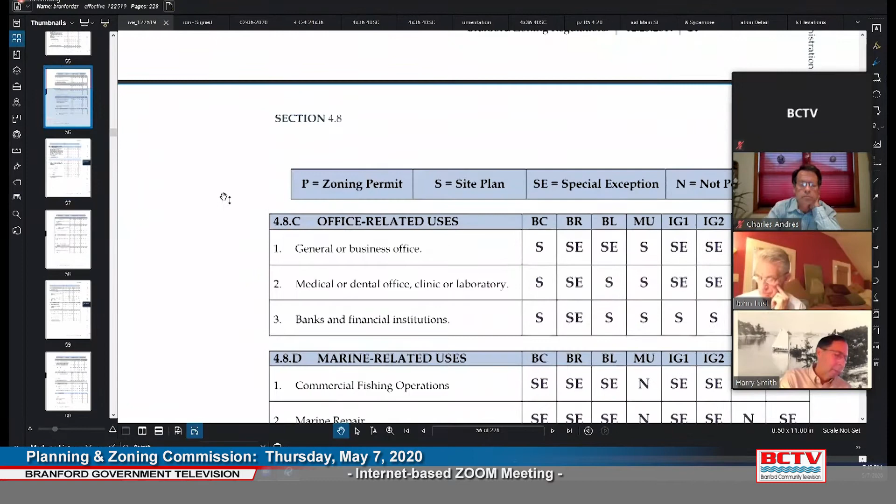In reviewing the town regs today to get prepared for the meeting, I thought it was interesting that in our IG2 zone, the regulation we cited, medical laboratory in the IG2 zone and the IG1 zone, requires special exceptions, which has triggered this public hearing.

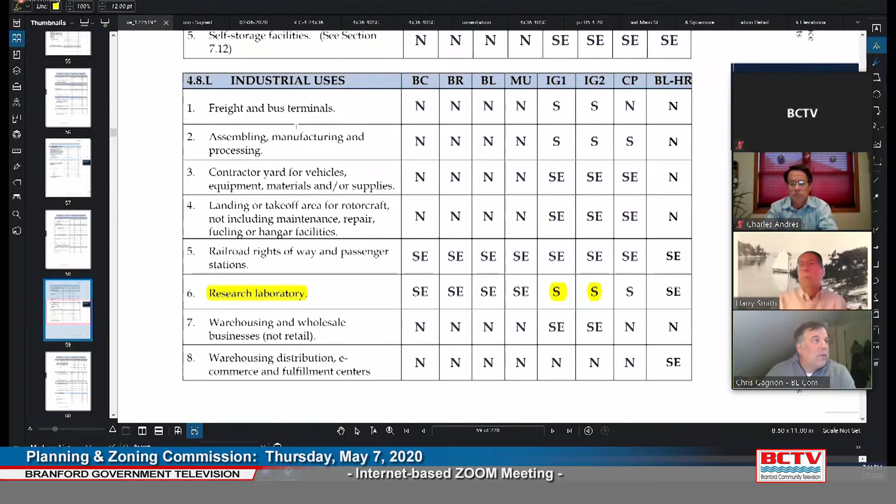Town Planner Harry Smith: Chris, you're also here because there's grading and excavation within 100 feet of an inland wetland, so that's a special exception in and of itself. So that's all folded together, and that's another reason why we went through the extensive public hearing process with the wetland folks as well.

So, but I just thought that was an interesting - what's the word I'm looking for - trivia of the regulations.

We're proposing a 20,000 square foot building. The building itself is well within what is allowed in terms of the regulations. We don't need any relief from any of the required regulations in terms of the building size, the parking required, anything like that. So it really is a good use for this zone, this laboratory office building.

It is an existing - not Guilford, that's the town next door - it is an existing Branford business that is looking to expand. Branford residents own it. It is folks who live in Branford, work in Branford, enjoy the town and want to stay in the town and are expanding their business in town. These are high-paying, white-collar laboratory jobs that I think are a real asset to any community.

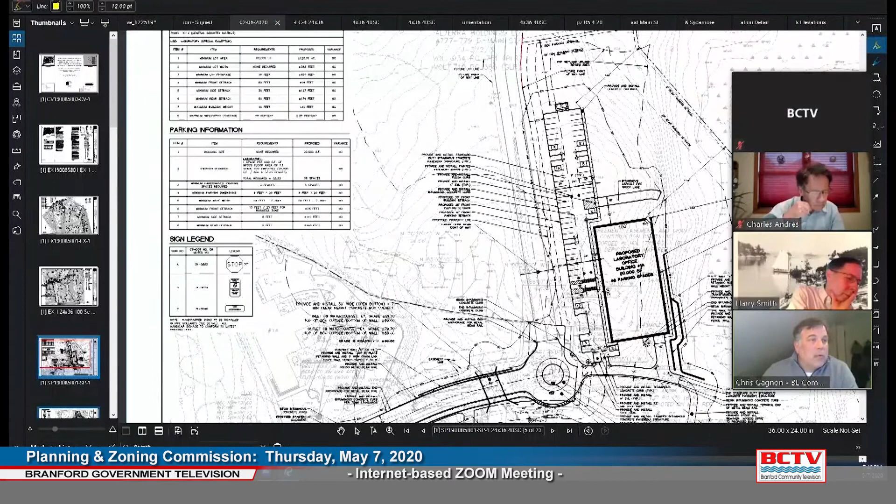We're proposing a 20,000 square foot building and associated parking spaces. Throughout the wetland approval process, we were working with the town engineer. We had a peer reviewer involved, and we worked with town wetland staff and met with the fire marshal as well.

A couple of the items, as a result of meeting with the fire marshal, we needed to include this fire truck access along the northern side of the building and provide an additional path of travel for fire egress for people within the building. So this building has been vetted, and parking and access has been vetted through the fire department.

We went through the wetlands process using the prudent and feasible alternatives process. This building originally was located a little further east, closer to the wetlands, so it has shifted over a little bit. To make the grading work, we need to use retaining walls.

The proposed retaining walls meet the town standards. Your town requires that they can't be any taller than 8 feet, and when you have more than one, you need to set them back from each other the required distance. So that's what's going on at the site.

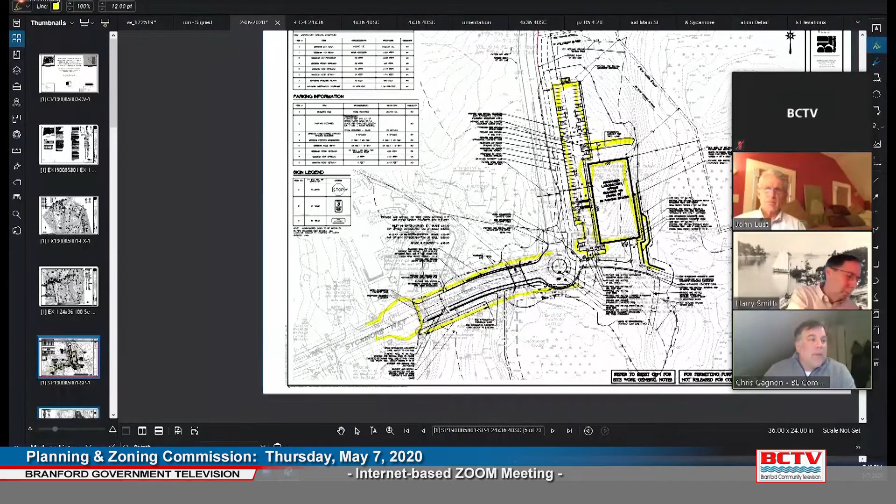Currently a cul-de-sac that ends. When the subdivision for Sycamore Way was made, this right-of-way was established to provide access to the properties back here. So going through the wetland process, our access point was really determined by the right-of-way that was set up.

There is a crossing here. It's a stream that comes down about like so. This stream then continues through a series of wetlands and then gets underneath I-95, in a pair of twin 18-inch squashed pipes. So to get under the highway, it only needs plus or minus 3 feet in diameter of pipe to get through.

In the wetlands process, we originally were proposing a smaller closed bottom box culvert. The process has evolved, and what we are now proposing is a 30-foot wide box culvert that has an open bottom to it. So we are maintaining the flow path and the ground cover of the native stream. In terms of wetlands impacts, this was the prudent and feasible alternative that we went with.

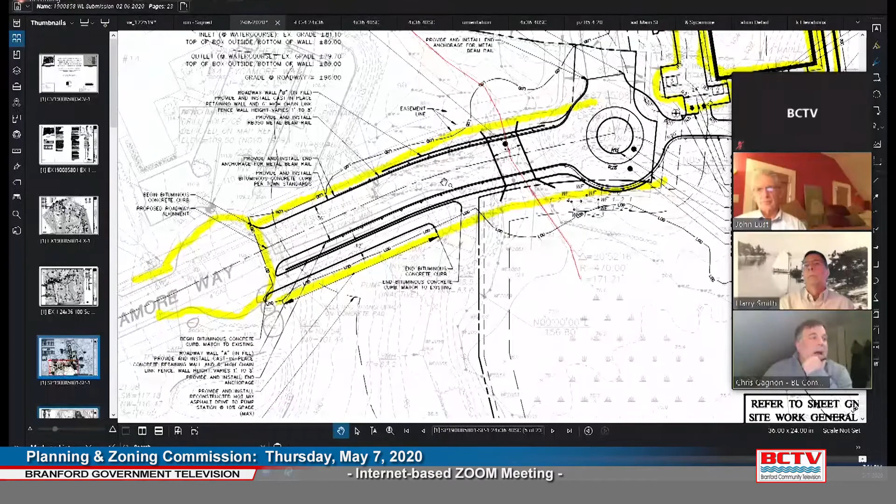As this plan set is currently provided, the initial concept was to have this cul-de-sac be turned over to the town. So it is currently depicted as a 36-foot wide town road meeting the town standards. We did that for a couple reasons. One, we wanted to make sure when we designed our retaining walls and got them permitted, we were depicting what was essentially the maximum footprint and wetland impact that we would have.

And so this footprint that we got passed through the Wetlands Commission is essentially as wide of a crossing that you could have and stay within the allotted right-of-way, and construct it with the retaining walls at the heights allowed by the town.

Going through the planning and zoning process, it was brought to our attention that the proposed infrastructure that was necessary to cross this wetland area, to the satisfaction of the Wetlands Commission, has set up a situation where the infrastructure is not something that the town is willing to maintain. So we are now proposing that this road, the extension of Sycamore Way, will not be handed over to the town, but will remain a private development.

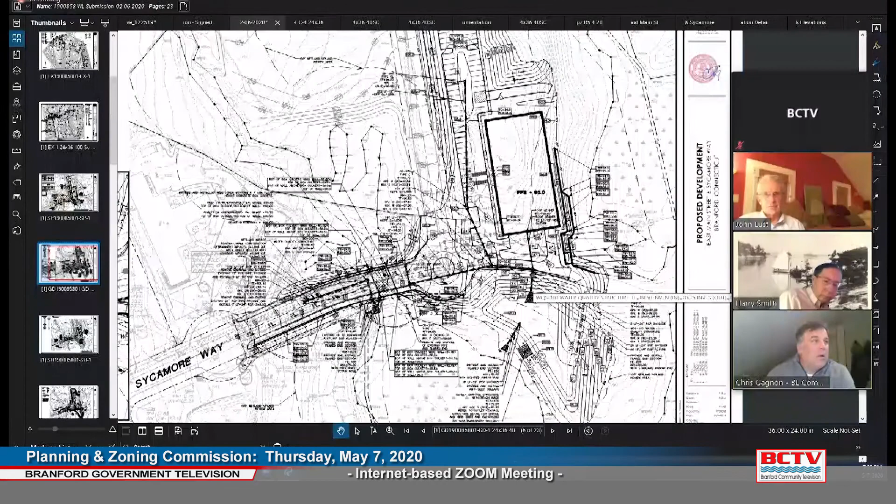To go a little bit into the plan set, the grading and drainage plan has again been vetted through the Wetlands Commission. We collect all of our runoff from the parking lots, the roof leaders from the building. We pipe that to a pond here via a hydrodynamic separator. So there is a water quality component to the storm system, along with the basin itself.

We also have a stormwater collection system that picks up what is the existing storm system for Sycamore Way, which currently ends in a head wall right there. What we are proposing to do is pick it up, route it through a water quality structure hydrodynamic separator, and then release it just south of the proposed roadway, so that the stormwater ends up exactly where it would originally. Currently, it follows this ditch right here and then turns down the stream. So we're just replicating drainage patterns and then providing some final scrubbing of it in the hydrodynamic separator.

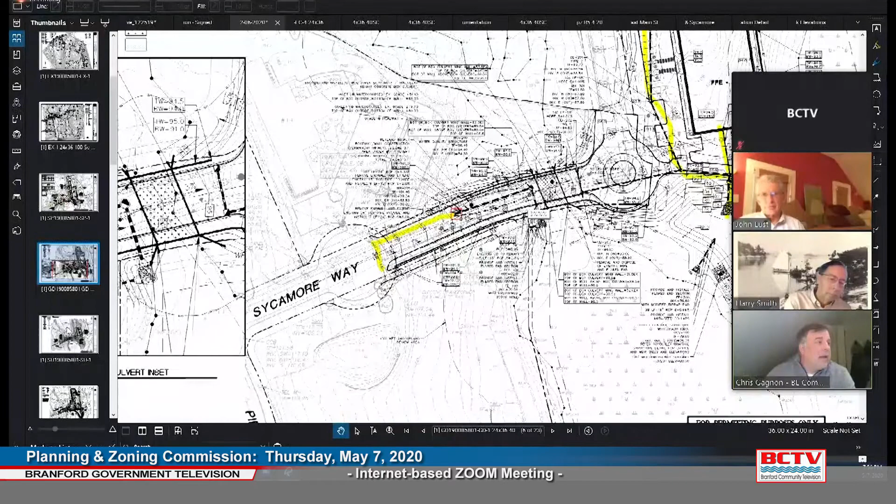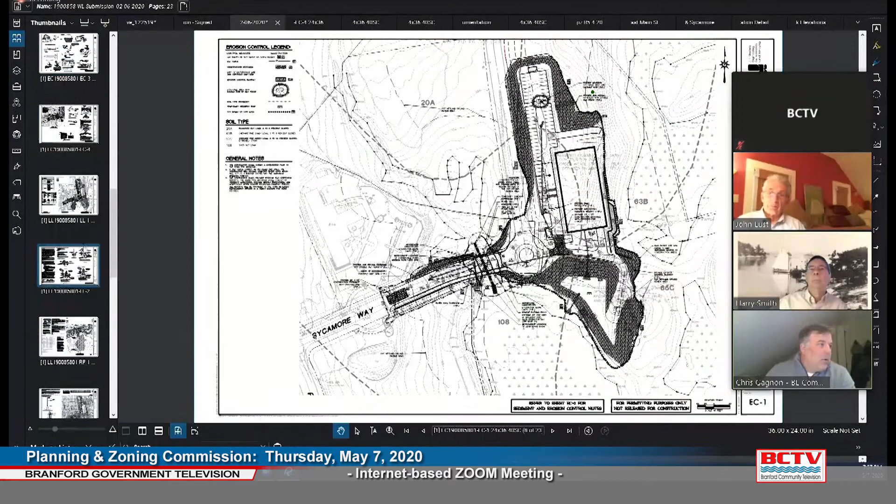We have a landscape and lighting plan. Going through the plan set, we have proposed utilities. We're tying into the sewer system on this side of Sycamore Way, bringing water in from Sycamore, electric, etc. So the utilities are fairly standard, but we have sewer and water in the area, no septic required. We have a comprehensive erosion control plan. Our overall impacts are less than what is required to trigger a formal SWPPP, but due to our proximity to the wetlands, the applicant volunteered to be restricted by the standards that would be applied to larger projects that need to get a formal SWPPP. We have also provided a landscape plan that is in compliance with the town regulations.

We have provided a site lighting plan, again, in compliance with the regulations.

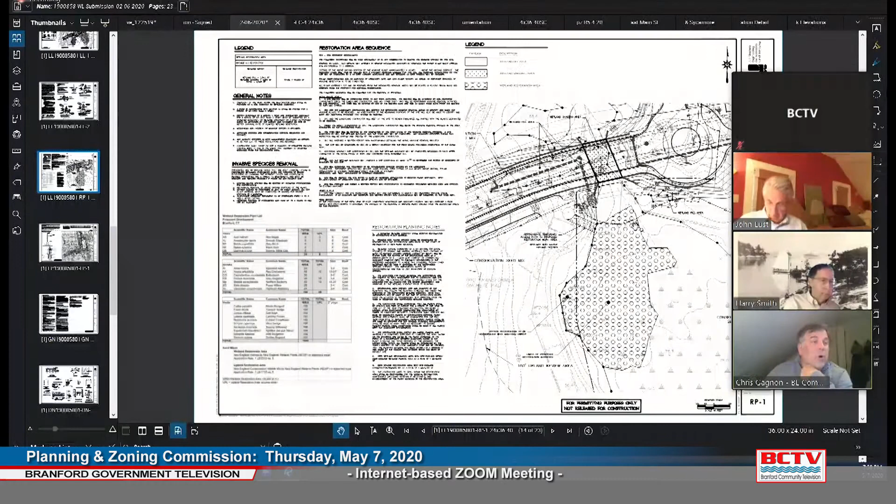As I'm sure most of you know, when you have filling of wetlands, you need to compensate for that in some way. The way in which we are compensating for the wetlands filling is we are proposing a wetlands restoration area. There's a well-defined pocket of Phragmites just south of the crossing that we plan on eradicating and replanting with native wetland vegetation. I thought it was an excellent and innovative way that the Wetlands Commission was handling that.

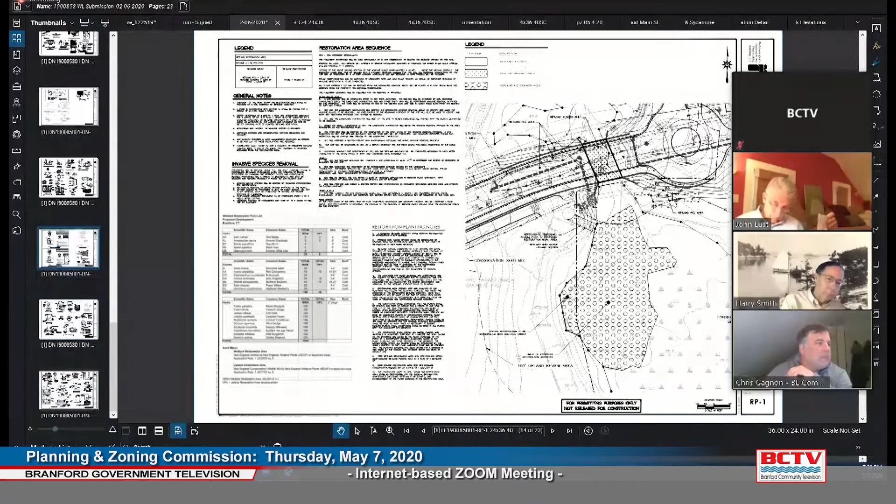And then the plan set gets into the details, the details for the hydrodynamic separator and things like that. So that is an overview of the process.

We have also been in receipt of a number of comment letters. I mean, not an overview of the process, an overview of the project, excuse me. We've also been in receipt of a number of comment letters from John Guskowski, a town planner reviewer. The engineer has provided some comments, as has town staff.

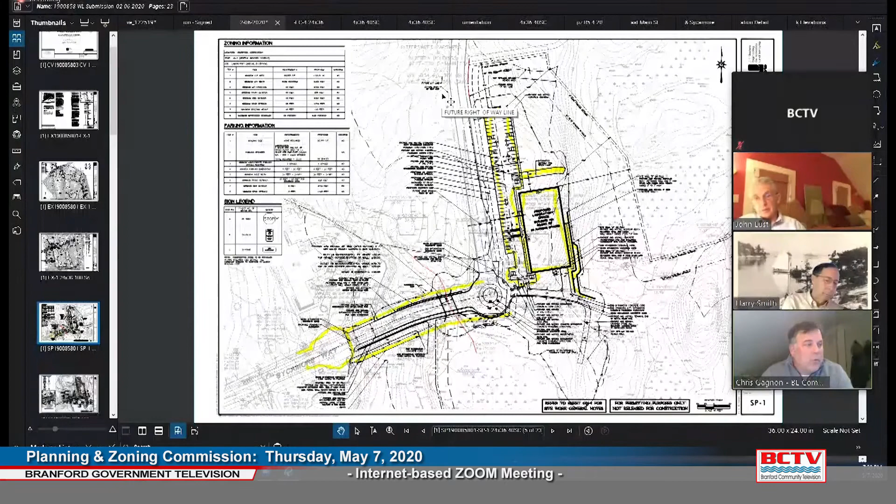I don't know, Harry, if you would like me to go through that, or if you'd like to take a moment now, and if the commission has some questions about what I've presented, this might be an appropriate time to do that. This is a little different because it's this type of public meeting - if we were all in the room together, people would have maybe raised hands or asked some questions at this point. So it feels like an appropriate time to at least throw that out there as an opportunity, but it's your meeting. So just let me know at this time how we want to proceed.

Charles Andres, Chair. Thank you, Mr. Gagnon. At this point, maybe we can ask Harry, do you want to summarize anything from the staff report, or do you want to turn it back over to Mr. Gagnon to address engineers' comments, or how do you think you want to present this to us, Harry?

Why don't I quickly summarize them, and then if there's anything Mr. Gagnon wants to get into in detail, we can do that, or any of the commissioners as well. A lot of these are sort of technical issues that are either well on their way to being worked out, or that can be incorporated as potential conditions if they need to be.

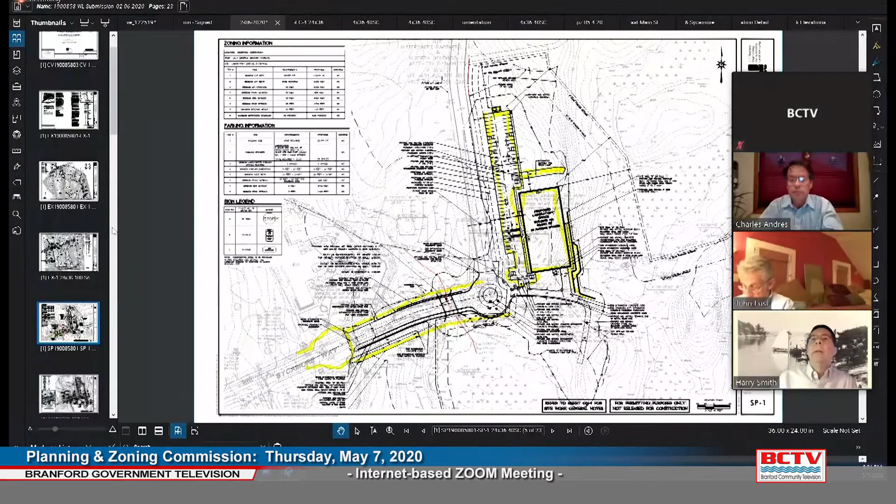But I want to back up a little bit and talk about the properties included in the application. There are two, as far as I understand it, and Chris, I don't know if you could go through and show - actually the sheet you had up was great, but we can do this too.

So there was a piece of the Bittersweet Farm that is now property of the U.S. Army. You saw that a second ago up on East Main Street. The remainder of the property, as far as I understand it, consists of two parcels, and the parcel line bisects the building, which just disappeared, but yeah, so the Army's up here. Chris Gagnon, BL Companies: the Army site is up here.

This was carved off of the property a few years in the past. That is correct. So Chris, can you show them where the property line is between the two parcels involved? Yeah, so it does bisect the building. But it's under common ownership.

Ownership, right. That could be addressed through a requirement to either merge the properties, or a requirement that would provide two options. One is to merge the properties. The other is to limit their separate sale without the express written permission of the commission.

But however, there is an area where the extension of Sycamore Way was proposed that is actually in what's commonly called a paper street that was part of the subdivision that goes way back to the 80s. So at that point, I don't know whether there was any design proposed for the crossing of the wetland. If there was, this could be vastly different and have created problems that were not foreseen back then.

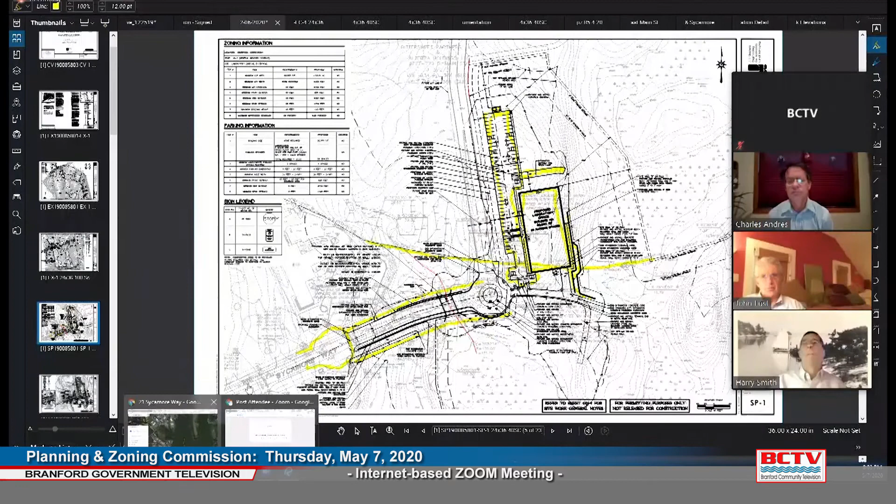And I know this is not gospel here, but you can see it's all connected through here. Yeah.

All right, let me show one map if I could. Chris, if you could let go of the share screen for a second. Yep, great, and I think I can do it.

So I should be able to see, again, that's the building and the parking area. And this is the existing cul-de-sac currently paved at the end of Sycamore Way. My understanding is the accepted town road ends here at the cul-de-sac, so this part of it is what you could call paper street.

My understanding is several easements exist that allow some of the proposed site development that extends off of the confines of the paper street, if you will, onto these adjoining properties to the north and south of the Sycamore Way and private driveway layout. I did receive from the applicants copies of the easements and this sketch, which I think is fairly new, within the last couple of days. And I've shipped that all off to town counsel just for a quick review. I'm assuming they cover everything that needs to be covered.

We just want to double check that. And town counsel was involved with the review of these easements during the wetlands process too. So I do believe it's 100% the right thing to send it their way for this review. But it certainly shouldn't be coming out of left field for them. It's information that at least has been discussed in the past. So town counsel does have some history with these easements as we work through the wetlands process. Okay, again, Harry Smith, town planner, understood.

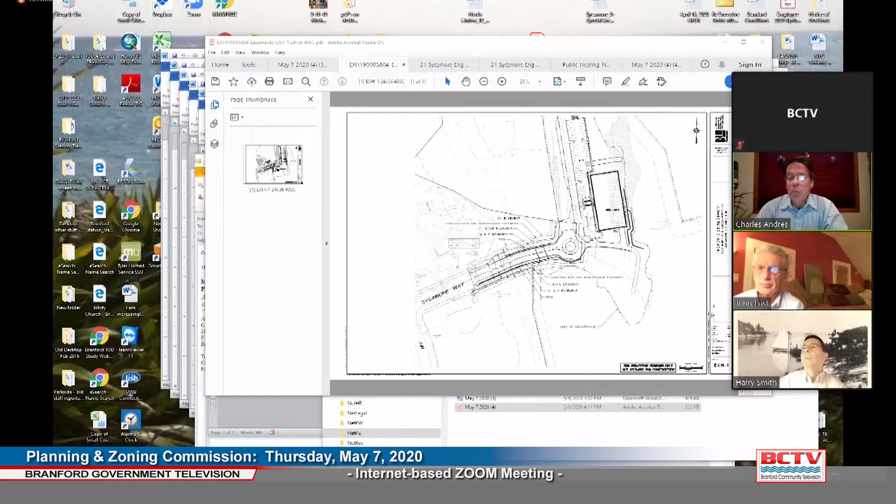If not, we can open it up to the public and ask if any member of the public would wish to comment. As Caitlin mentioned, you can either send a message through chat or raise your hand. Do any members of the public wish to comment?

Okay, seeing no members of public comment, we are going to continue the hearing. Is there anything else that the applicant would like to add at this time, applicant or staff or commission?

Not at this point, however, I just want to make sure that the folks who are muted can raise their hands. So maybe Michelle, could you try and do that if you know how? I'm the host, I can't see the button. Okay, sorry to put you on the spot. She said hover over here, go to your participant listing and click more, but I can't see it from my viewpoint. I don't see it. Is Caitlin there? She could tell me. I'm new at this as well. Maybe I'll pick on someone from the audience here at random.

Maybe you, Mr. Lust, could you try and raise your hand? Caitlin Piazza, Assistant Town Planner: Marjorie is currently raising her hand, so. Oh good, okay, so it's workable. Thank you so much. Just wanted to make sure it was functional. Okay, thank you, sorry for the interruption.

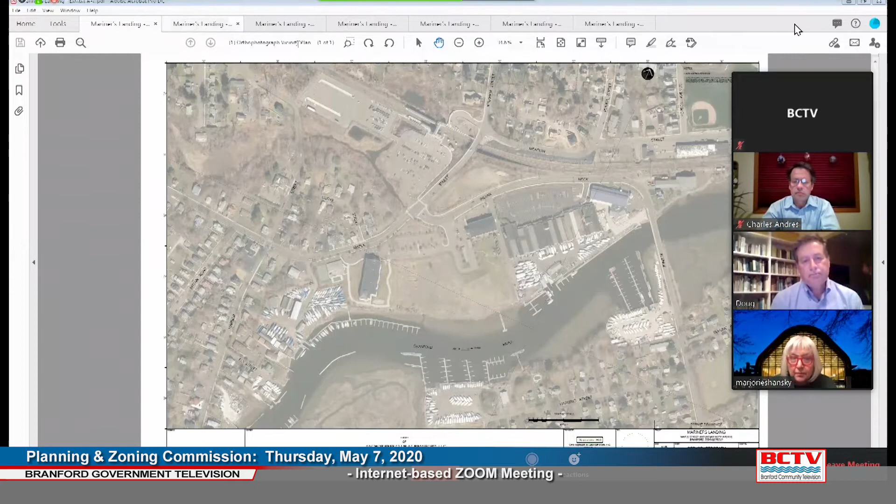This is a zoomed out view of the current site and its environs. Please stop me at any point if you have questions. This next drawing is a zoomed in view of the site itself, the Anchor Reef development, which I'll again trace really quickly.

Here's the clubhouse, the pool, and the tennis court that I was talking about. The boundaries of the site go up along the street line of Maple Street, Indian Neck Avenue, straight down to the river, along the river, and back up again.

That entire current parcel is about 11.25 acres. The portion of it that Mariner's Landing proposes to develop is approximately 7 acres.

Its boundaries start at the intersection of this sidewalk, running parallel to it, straight up to Maple Street, along Maple Street, along Indian Neck Avenue, back down alongside the east side of the main driveway to the existing site, back over to the common boundary between the Anchor Reef development and Land of Marine Systems, Inc., then down to the river and along the river and back again. So the proposed development area is approximately 7 acres.

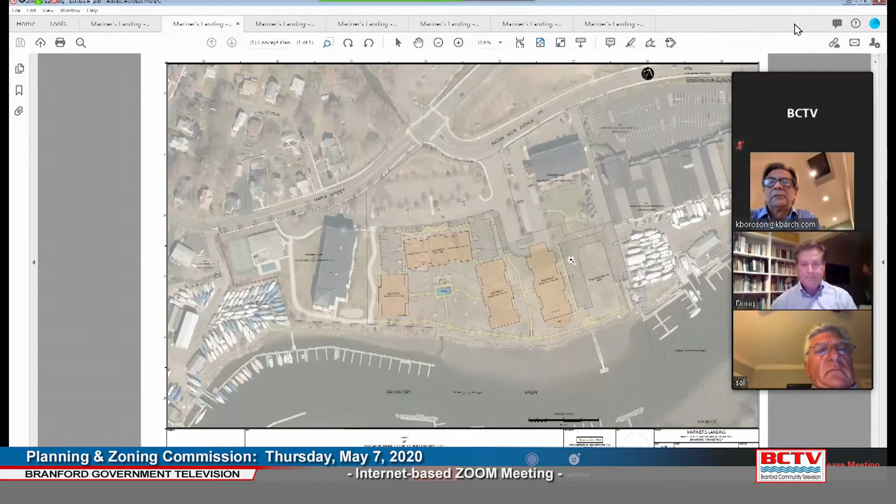There is a proposal to provide public access to the waterfront and to the existing dock here. There's a fixed pier and floating dock section that you're probably aware of. There'll be a swimming pool, patio, and cabana area associated with the development.

Ken Boroson, the architect, and Doug, the landscape architect, will explain more of the features of the public amenities, public seating, and public viewing areas.

The site is within the coastal boundary and almost entirely within a special flood hazard area zone. So the non-parking level of the buildings have to be elevated at or above the base flood - actually 1 foot above the base flood elevation. I forgot to mention that the plan is to have parking on the lower levels of all 4 buildings.

I think that's a general overview of the site, and unless you have any questions, I'd like to turn to the architect, Ken Boroson.

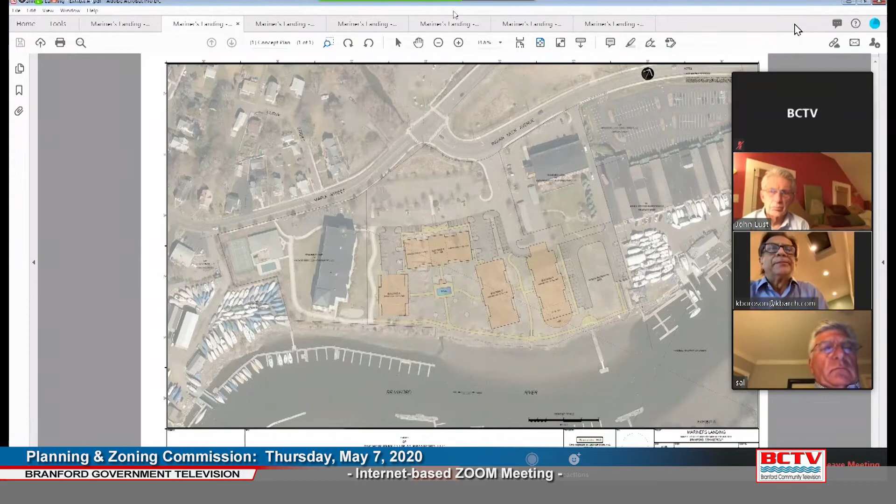Doug, are you there? I'm here. Is my cursor working? Can you see my cursor? No? How do I share screen? I guess I'll describe it instead.

Thank you. Doug Keacha, Douglas S. Keacha, Landscape Architect, LLC, just for the record, registered landscape architect. The landscape plan started with a review of the site plan and the architectural plans.

The placement of Buildings A, B, and C creates a courtyard that's open to the river. This area also includes the pool and gazebo. The proposed plantings in this area were meant to scale and soften the buildings and provide some privacy for bathers, as well as provide a variety of more intimate outdoor spaces for residents, all while not unduly blocking river views.

Circular patios located in the lawn area between the pool and the Riverwalk are shaded by trees for hot summer days.

These trees will also frame views of the river from the apartments. Buildings C and D form a linear green space. Narrow, mid-sized trees are proposed along the common walk between these buildings to green and shade the space and form a screen to short-circuit views from apartment to apartment.

A buffer planting is proposed along the Nellie Green property line. Tree placement is as close to the property line as possible so as not to block views across the open lawn area from the adjacent building behind our project. This lawn area is also left unplanted with the exception of a few perimeter shrub massings and parking area screen plantings.

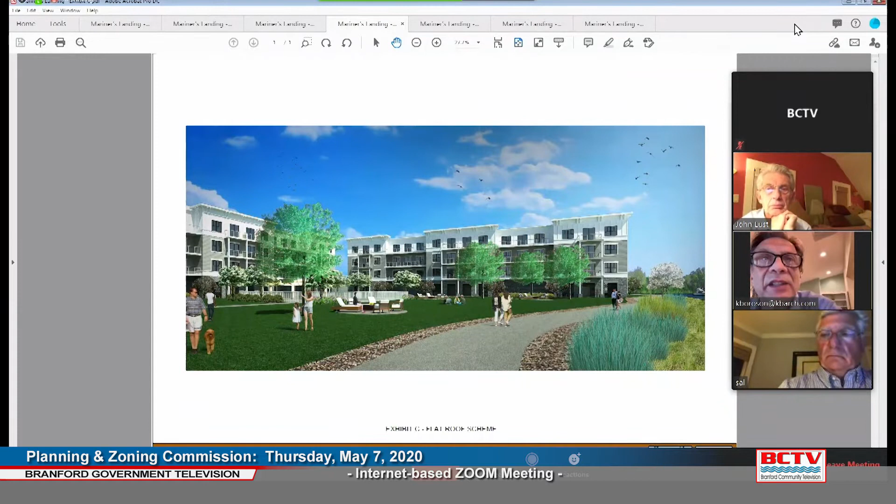Those items include creating more substantial porches and adding awnings to the lower level. The pros to this option: it's capped at 50 feet to the parapet, it allows a 360-degree view if you're on a roof deck, it's a little more efficient to build, and it's got more of a contemporary feel.

Mike, can you go to the next? Yep.

So this is the gambrel roof option. We've created a nautical gambrel roof style that provides kind of Nantucket gables, varies in height, has low slope dormers. These elements would surround a flat roof in the center of the building, but your view is indicated in the perspective. We've added a layer of tighter horizontal siding divided from the lower wider horizontal siding with a band board where the gambrel begins, and added upper diamond pattern gables that project from the lower gables and are carried by 14-inch brackets.

We substantially beefed up the porch structure, providing tapered columns, deeper beams, and more articulate trim at each level, utilizing classic proportions to create stronger structures on their own. We've also added lower level awnings, burgundy and white, to accentuate the lower level, add a pop of color, and nicely contrast with the gray siding.

Again, both the porch design and the awnings could be added to the flat roof option. The column type would be a little different if it was on the arts and crafts—it'd probably be tapered and square. We also added a flagpole in the courtyard.

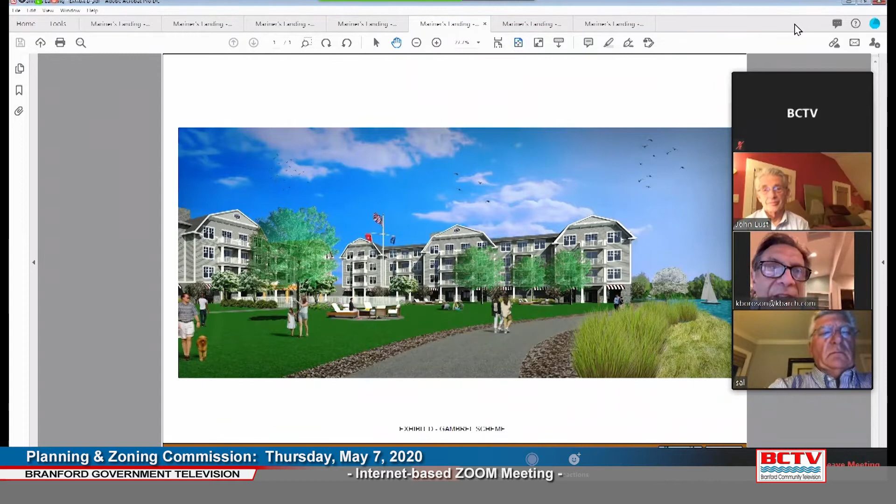The pros to this style is it's more varied in its roof line, lower at the edge of the building, and it's more traditional. Mike, can you go to the next one? Yep.

So here's an elevation where you can really see the details. You can see the varied roof line. The main roof is behind sort of the shed roof, which is the darker gray between the gambrels. Behind that, it's at 46.6. The top of that shed is at 49.

The architectural features in this option—a portion of that uppermost triangular gable—are a bit higher than the flat roof scheme, but they're about the same height as the building to the west when you consider the peaked elements of that roof. Those architectural features in the uppermost portion of the gables would be less than 25% of the roof area. So again, you can see the beefier, wider columns—14 inches tapered to 12 on the porch. Larger beams, 1 foot beams with trim on each level, so they kind of speak and complement the more detailed style of the gambrel Dutch colonial.

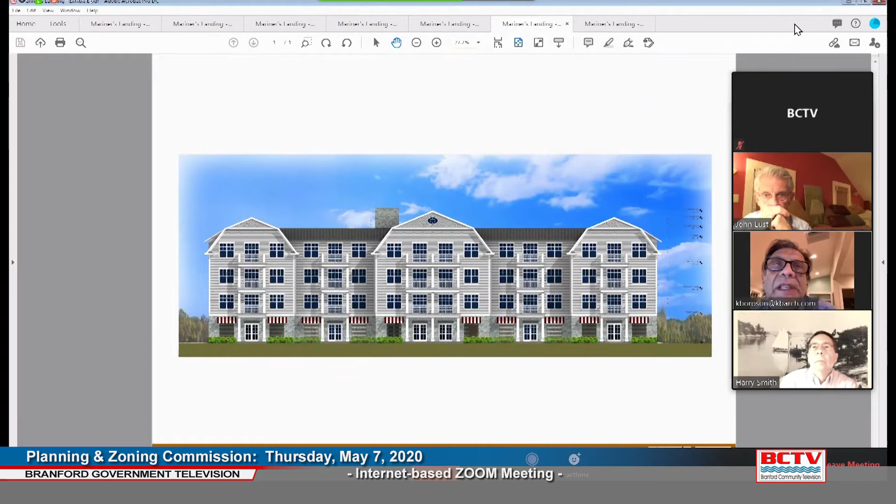Okay, so finally, the commission in our last discussion was clear about the need to have a public program element near the water. The coffee shop that was described by Mike is located at the lower level of Building D and opens to a semicircular deck shown with umbrellas here that's adjacent to the public walkway. This perspective view is from the public walk as you round Building C and look toward the coffee shop, the public dock that's there, the new semicircular patio opposite the dock, and the public passive play area behind where families can fly kites or play ball.

We believe this creates a better public accommodation to the project and was expressed in the last informal meeting. We believe the development's better for it. Please note that we don't have an exact topographical survey yet, so the levels might be slightly different. We think the building to the left is slightly higher up, but we'll deal with that when we have the exact topographical survey.

So we're very interested in knowing what the commission feels about these options and if there's a general consensus. It was interesting—Sal was telling me that he took a poll and about 50% like the flatter roof and 50% like the gambrel roof. So we're very interested in hearing what you say. And I'll send it back to Marjorie so she can field the questions.

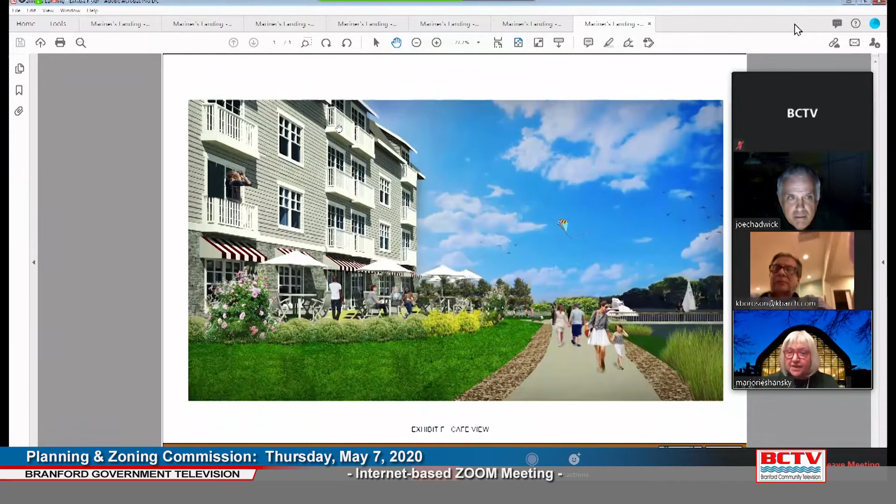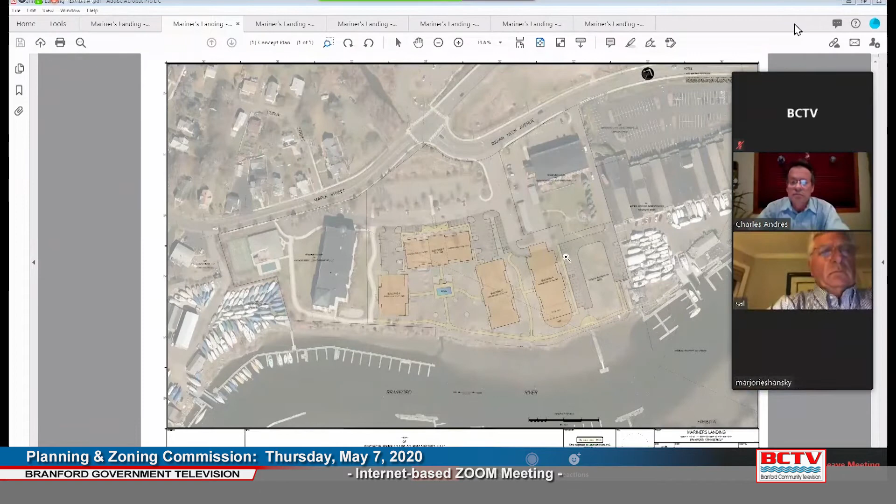Marjorie Shansky: I want to go back to the site plan for a second, Mr. Ott, because there's additional commercial space that I think was not commented on originally, and that is in the front building. Mike, if you could put the site plan back up. Bear with me if you can hear me—I'm trying. So there's additional... Mike, I would go to the landscape plan. Go ahead, Ken.

Ken: Would you like me to comment on that, Marjorie? Joe, thank you for your comments—I'm glad you commented on the style, and I think the gambrel is more vernacular in that way. But the coffee shop is not the only commercial element there. There's a coffee shop at the end of building D, about 2,200 square feet, and there's another business Sal is talking to that would go next to that, another 3,100 square feet. So there's approximately 5,300 square feet of commercial space at the bottom of building D. The parking area to the east of that and the passive play area are all meant to be public amenity space, including the circular area opposite the dock to define the dock area with benches. So that whole area, essentially from the bottom of building D down, and to the east of that, is all public oriented.

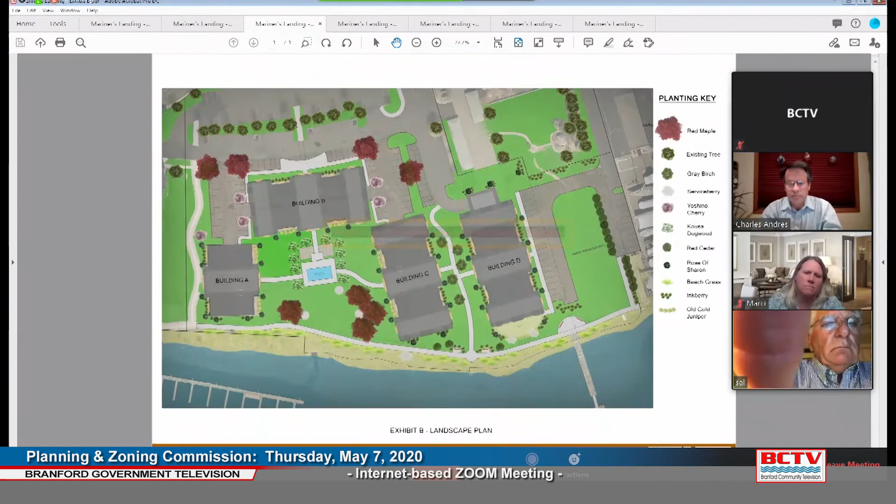Thank you, Joe. Charles Andres, Chair: Mr. Borison? Yeah, when we first came last time, it was slightly less, 139. But then we moved the gym to the lower level, picked up a couple and added a few on the backside, so it's at 147 now.

It's a nice mix. I agree that with a transit-oriented development, more density brings more life. It's great, I think it's a good thing, but for what it's worth, wasn't there a development way back that was way more dense?

Harry Smith, Town Planner: I'm not aware of that. It's possible — the history of this goes back almost 20 years, I think.

Just in response to Joe's comments, I think building D — the idea at one point, correct me if I'm wrong, was for it to be a hotel, and at some point, the last go-around, that was one option, and then multifamily was another option. It sounds like possibly you're settling on the multifamily at this point rather than the hotel.

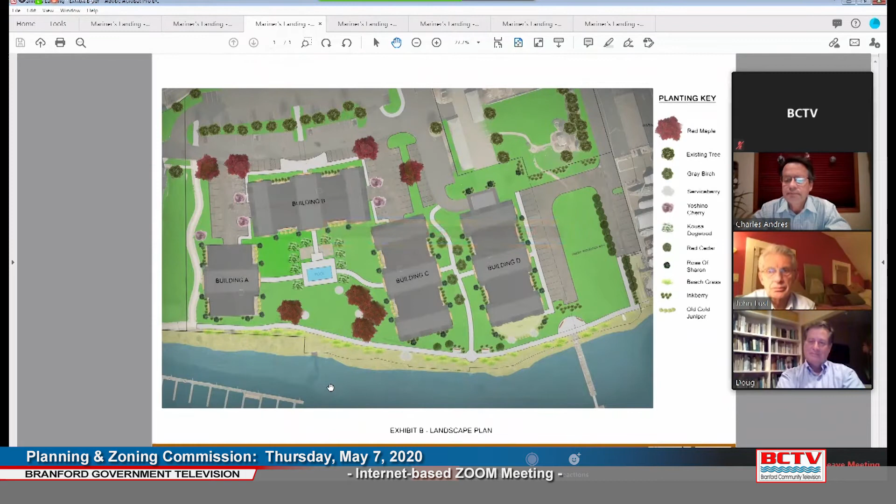Nothing else. Okay. Anything else? Do you guys have any other questions of us, or I mean, we're just sort of giving our reactions. Right, so you've heard five different reactions. So what do you think?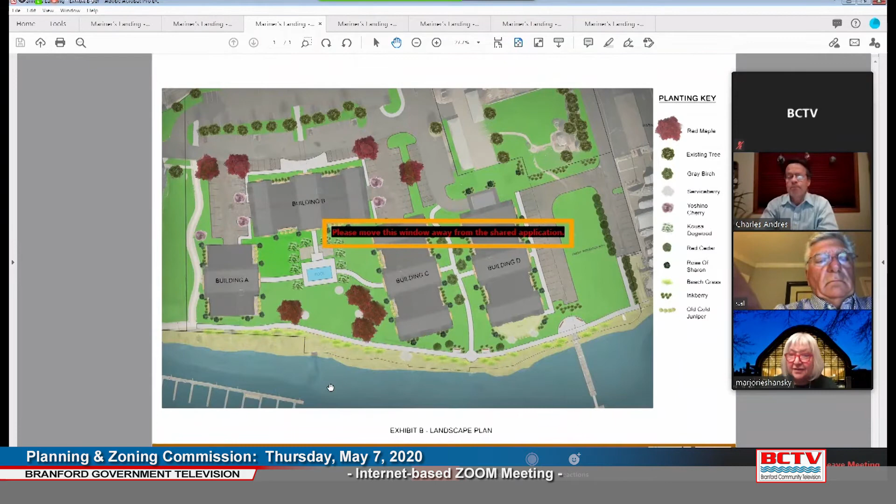I hope we've given you some sense here. I think that's been very helpful, Mr. Chairman, and it will give us an opportunity to talk about what we've heard here tonight. We're pleased that we seem to be making progress on the desirability and layout of the public access, and we'll continue to work on it.

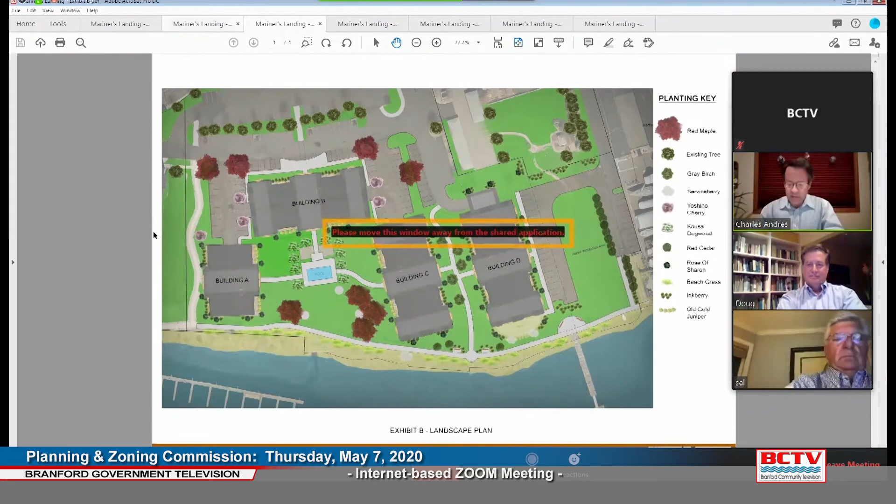So then that brings us, going through our agenda, to item number 2 of other business, which is a time extension request for 8 Fellsmere Farm Road. Harry, can you tell us what this is? Yes, Town Planner Harry Smith, this was a section 6.8 approval for regrading. They got 1 year, they would like another year. There's a single family house on Fellsmere Farm Road, so it's pretty much straightforward.

Okay, so, Chuck Andres, Chair: as far as you know, there's no change in circumstances or any reason that we should not grant the extension, as far as anyone knows? Harry Smith, Town Planner: I know no reason to not grant the extension. Okay, again, Chuck Andres, Chair.

Does someone want to make a motion to approve a 1-year time extension for 8 Fellsmere Farm Road? John Lust, Commissioner: I'll make that motion. Motion made by John. Is there a second? Chuck Andres, Chair: Joe Chadwick seconds. Second by Joe Chadwick. We'll go through the list.

John, how do you vote? Affirmative. John Lust, affirmative. Joe Chadwick, in the affirmative. Joe Vayuso, Joe Vayuso approves.